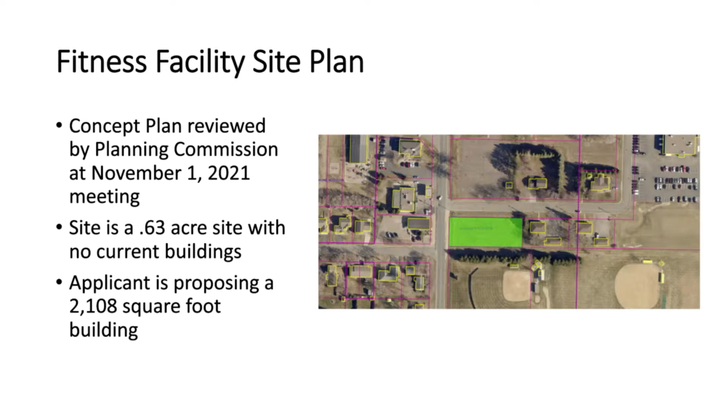Matt: Thank you, Mayor and Planning Commission members. So before you tonight is a fitness facility site plan that was submitted by Bodie Studios. The Planning Commission did review this as a concept plan back on November 1st, 2021, and did approve that concept plan at that time. The site is a 0.63 acre site at the intersection of Henry Street and Campbell Street. The applicant is proposing building a 2,100 square foot building for a fitness facility.

So the proposed plan falls within the C2 Highway Commercial District, and this is an approved use within that commercial district. Currently, based on what is submitted and the site plan before you, it does meet all the site setbacks. They aren't all currently in front of you, but if you look at your agenda and in the memo there is a table that lists what they're proposing in terms of setbacks and what the actual setback requirements are, and they do currently meet all of those setbacks.

In terms of uses surrounding them, they are all commercial, except to the south there is a softball field, and that is technically zoned residential, but they still do meet those setbacks for a residential requirement as well.

Just to go over this real quickly too, this does pose an interesting dynamic in terms of trying to make the site work. So in working with them, we did allow, even though the access comes off Henry Street, the building technically fronts Campbell Street in terms of setbacks and meeting setback requirements.

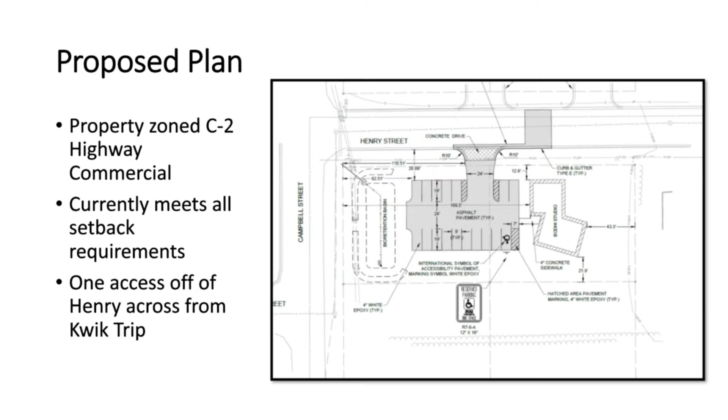The site will be served by a 1-inch water main coming off Henry Street and a 4-inch sewer line. No additional fire hydrants are required, as one exists at the corner of Henry and Campbell. Separately, the developer will be required to submit and apply for all sign permits that will be attached to the building or elsewhere. The developer is required also to put in 17 parking stalls, as it is a retail use.

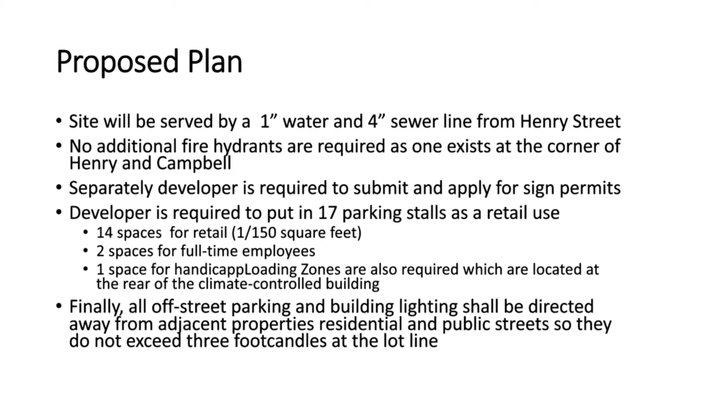So 14 spaces for retail, that's 1 space for every 150 square feet, 2 spaces for their full-time employees that they've indicated in the building, and then 1 space for the handicapped area. And then finally, all off-street parking and building lighting shall be directed away from all residential properties, and must meet our requirement of 3 footcandles at the lot line.

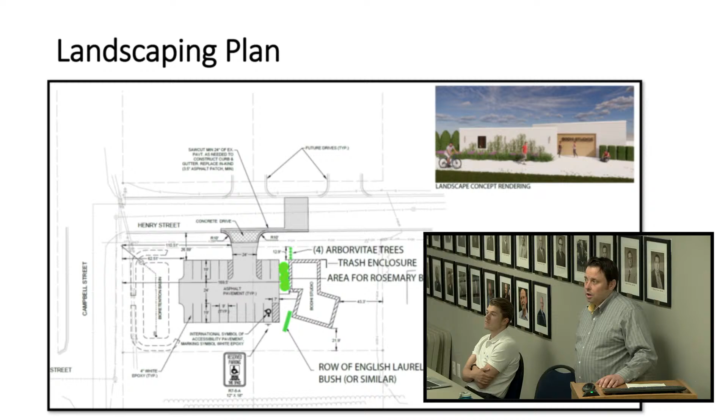The developer was required to submit a landscaping plan. We don't have any hard and fast requirements other than it is a requirement that they submit it. Per the concept plan that was submitted back in November, you can see they are trying to match that as well. There's 4 trees at the front of the property.

Per our code, those will be required to be just 2 feet off the property line. And then some area for a rosemary bush, and finally a row of English laurel bush as well to the left. You can see those somewhat indicated in the concept plan, which you'll see better here in a second. So if you look to the left and right, you can see on the image above what they're trying to demonstrate.

Again, the architectural height stands at about 13 feet 6 inches, if I recall, which does easily meet the height requirement for the C2 zoning as well.

In terms of the stormwater plan, the stormwater pond is going to be off the west end of the development and will drain into the Campbell Street ditch. The comments from our city engineer were submitted on May 18th, 2022, and will need to be included in the development.

They're within your packet. Really, the only issue addressed was the typical details for Henry Street pavement replacement. Curb replacement must include 12 inches of sub-base thickness, 8 inches of base thickness, and 4 inches of asphalt thickness. That's more so for the area needed to be replaced on Henry Street, which is something we can work with the developer on, because if you've seen Henry Street recently as a result of Kwik Trip, it's in a very bad state.

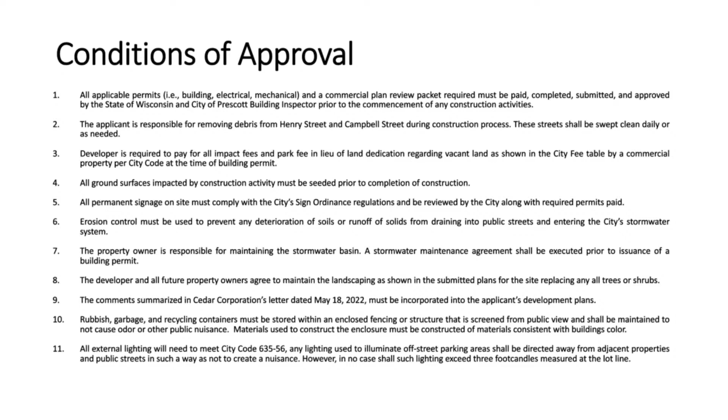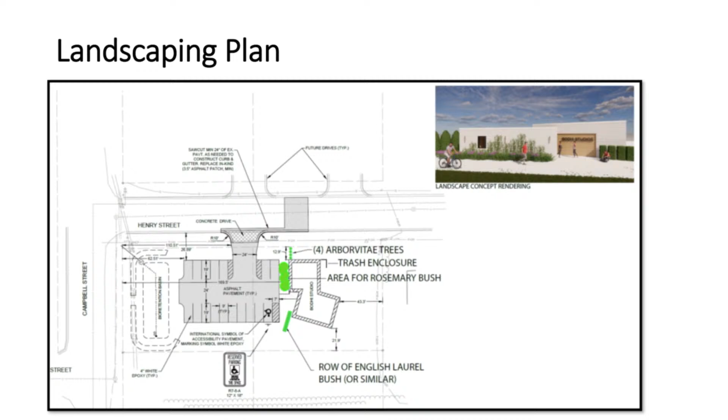I won't go over all the conditions of approval, there's a number of them here. It covers many of the things we already talked about. Just the last one I'll note, going back to the landscaping here in a second, is that there's a trash enclosure. One of the conditions is that the trash enclosure is maintained to the likeness of the building and that it screens the garbage and rubbish from Henry Street and the residential property to the east as well.

So with that, I'll turn it over to the Plan Commission for comments and questions regarding the site plan.

Is this site going to have its own retention pond, or is that just going to drain into the sewer system on Henry Street? Nope, it will have its own retention pond off to the west there that our city engineer did review, and then from there it drains out. I should note too, Jonathan Bartling and Courtney Franklin are both here, they're the developers as well if you have questions for them. Jonathan, correct me if I'm wrong, but the site will drain out to Campbell Street from the bioretention pond, stormwater pond that is on the west of this site.

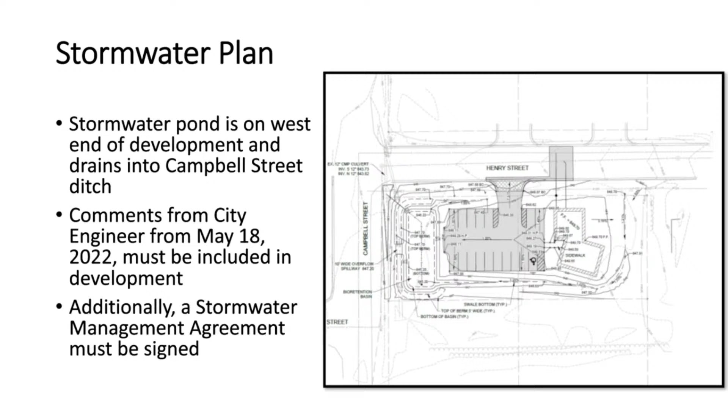The repairs on Henry Street, are they going to be done before this project starts, or? Well, that was one of the things we were going to possibly discuss, is if ideally they could get in there before those repairs are done, get the sewer lateral and the water laterals put in for the project, so when Kwik Trip comes in and replaces it, we don't have to do a patch job. Generally we charge a $1,000 street opening fee as part of any development, so as they come in and rip up the road and then patch it, that's part of a requirement. But if we could do that before.

Can I speak up about that? Sure. I do need you to come up here, please, so that the audience can hear you. What was that? We're televised live. We need you to come up to the podium, please, tell us who you are and all that good stuff, please.

I'm Courtney Franklin, I'm the developer of Bodie Studios. I was going to take pictures of Henry Street because it's pretty tore up already from Kwik Trip, but I think our projects will be happening simultaneously for the most part. So I agree with you, if we can hold off on repairing anything that needs to be repaired, we could work together, and if we cause any damage to Henry Street, do it at that time.

No sense in repairing it twice. That's right. Courtney, is that a garage door? No, it's not. So if you go back to that, I can kind of explain. Bring back that landscape photo. Yeah, I'm just curious.

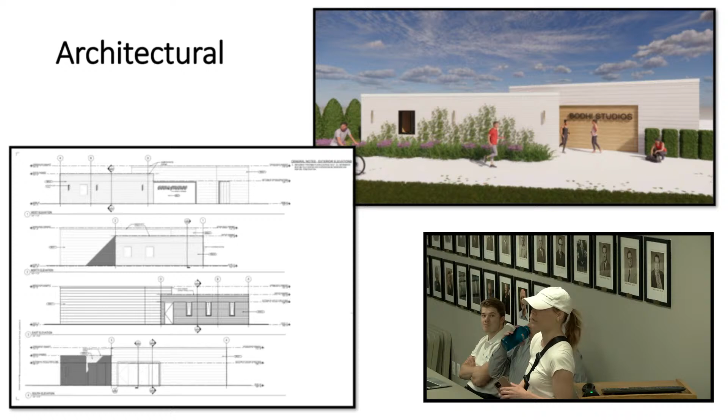So what you're looking at is actually two different kinds of cubes, if you want to look at it that way. It's a modern design. That's an inlay of light wood, and that's where the entrance is. You can see there's an illustration of people coming in and out. The door is actually right here.

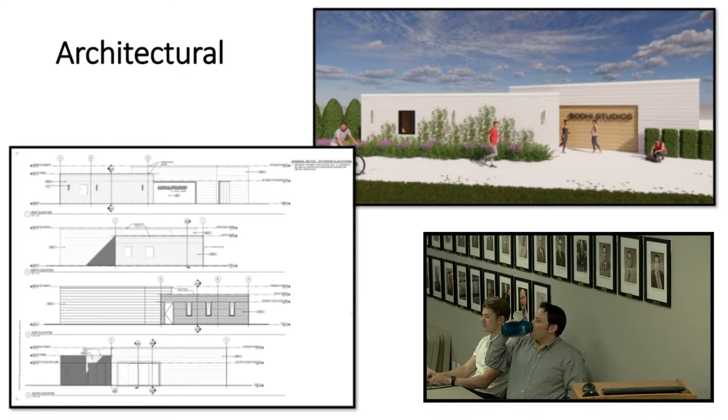You walk in here. So if you're looking at this, you'd be standing in the parking lot. This faces Campbell, so for aesthetics and everything, it's going to make that area really pretty.

When people are driving by, it's obviously a very busy street. They're not looking at the side of a building, they're looking at a beautiful building. And then there's like grass between the parking lot and the studio? Is there some? Just trying to get this idea.

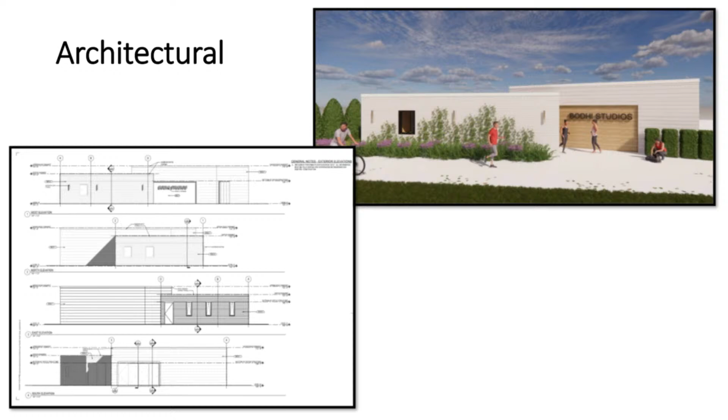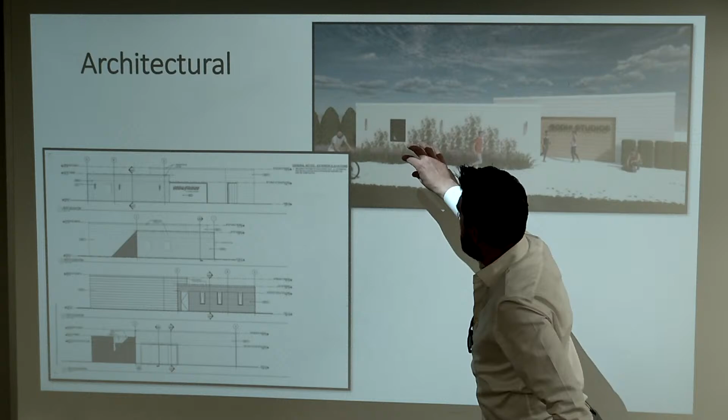So this rendering you're looking at here was put together before the final site plan. This is concrete right here. There'll be grass to the right and some grasses here to the left, and then grass kind of all around the parking. But this is the edge of the parking here.

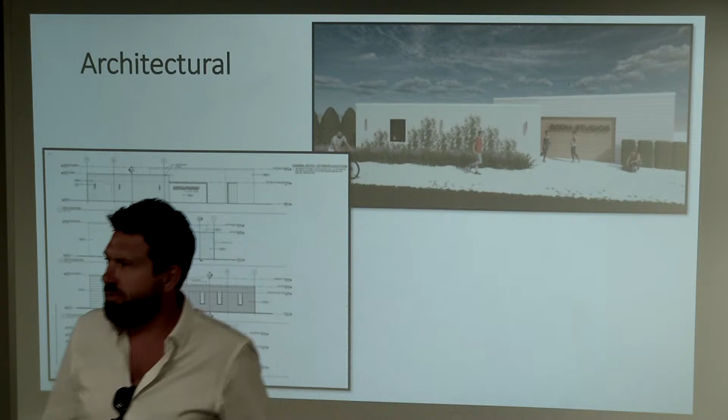So where the biker is, that'll all be grass. And the wood will be backlit, the Bodhi Studios sign will be backlit, so that'll light up at night. We need to get the signage permit for that. And then there'll be a strip light in that recess that washes over the wood at night, leading you into the entry.

Okay, thank you. Anybody have anything else?

Okay, so we need to approve the resolution to move it forward to council? Yes. Okay, we have Resolution 18-22, a resolution approving the site plan review for the development of a fitness facility at 1125 Henry Street. I'm not going to read it, it's quite lengthy, but I'll need a motion to approve the resolution to approve the site plan.

I'll make the motion to approve the resolution of the site plan. Have a second? I will second. All right, we have a motion and a second. Is there any discussion on the motion? If not, all in favor say aye. Aye. Aye. Opposed? Okay, motion carried. Thank you.

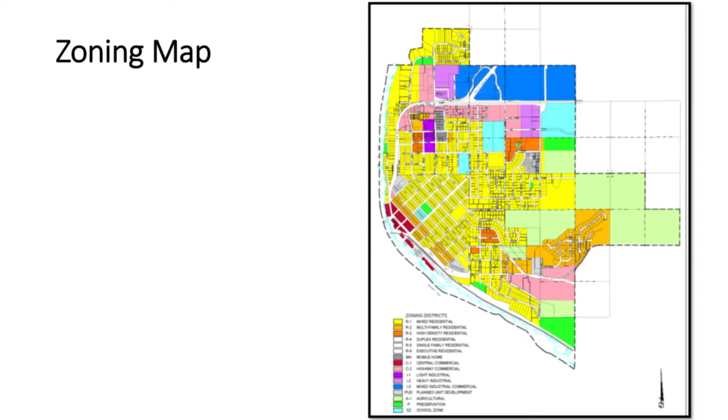So with that, the recommendation before Planning Commission tonight is to review the proposal. Bob Colson with Cedar Corporation is here as well to answer questions and have discussion, and then consider recommending it to City Council for approval. So I'll turn it over to the Planning Commission for comments and questions.

Do you have anything?

So we're just going to, if we approve this, we're moving it forward to council, correct? Yeah, so we'd have it on council at next Monday's meeting if it's approved tonight.

So we have a confirmation of client request for services between Cedar Corp and the City of Prescott. We need a motion to approve the agreement, and it is for $17,850 to Cedar Corp.

I will make that motion for the proposal to review and amend Chapter 635, Cedar Corp. I'll second that motion. All right, we have a motion and a second. Any discussion on the motion? If not, all in favor say aye. Aye. Opposed? Thank you very much.